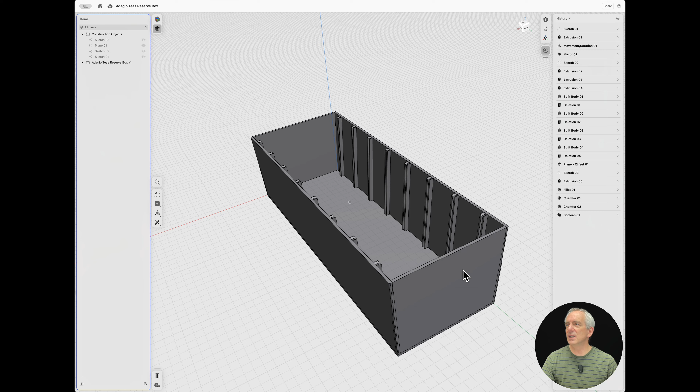I'm going to make a purpose-built box that's going to fit them better. That will be today's daily print. So there's nothing particularly complicated about this design. Here it is finished. I'm going to go ahead and put a breakpoint in up top. And let's bring this first sketch and make it visible again. So it's just a rectangle, 356 millimeters long by 126 wide. 356 is just under the 360 that fits on my printer.

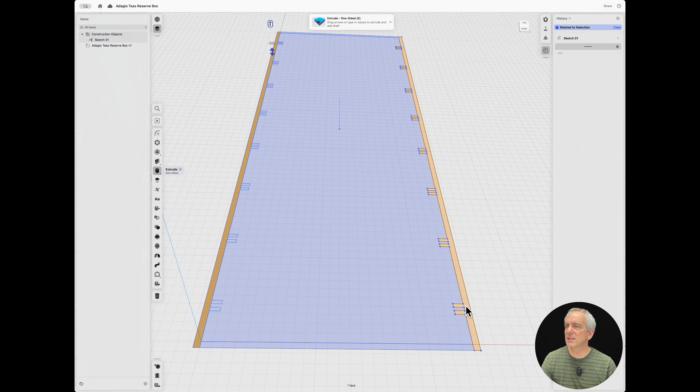And then I would extrude these sides up, the two sides, not the ends. And I began going in and trimming these endpoints on these rectangles. So these little flanges, almost like brackets, I drew this first one here, just drew two rectangles, and then selected them as objects, and then used the linear pattern to bring them down all the way to here. About 36 millimeters between them, 8 of them stretched over the distance that's centered.

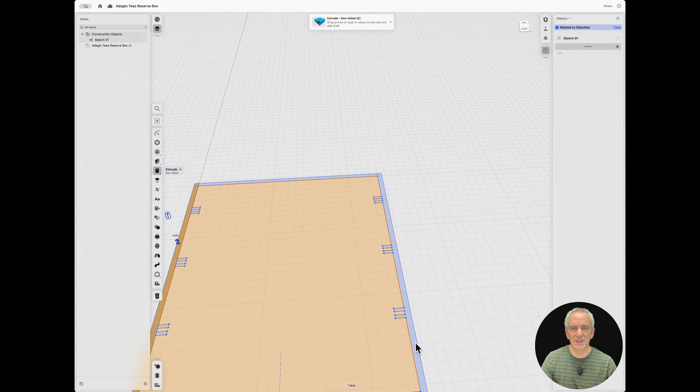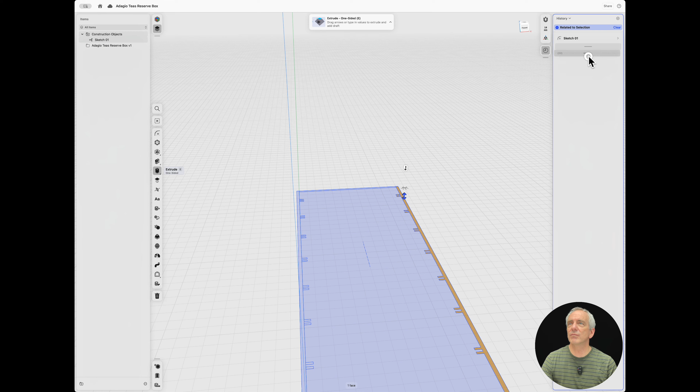Anyway, I need to extrude this up, and on this side I needed to also take away these ends to extrude it, and I had used the center line to mirror these small bracket pieces over to the other side. I wasn't thinking straight. I didn't need to do any of that. All I need to do is make this one side and mirror the whole thing. Anyway, so moving on, insert the breakpoint.

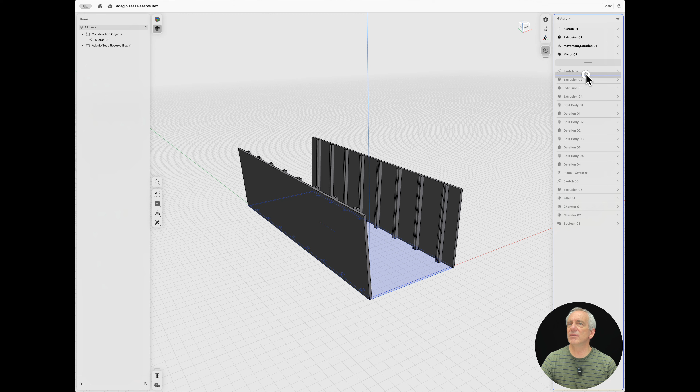So I went ahead and extruded this one side and then took its top and moved it out 6 millimeters so that this ends up having a bit of an angle out, which is what I wanted. And then that could just get mirrored over to the other side. So there are my two sides. The ends I didn't want to have tipping out. So I then sketched above, and that sketch is not visible. I sketched above it, and these rectangles then at the ends I could extrude down. And so those got extruded down on each end.

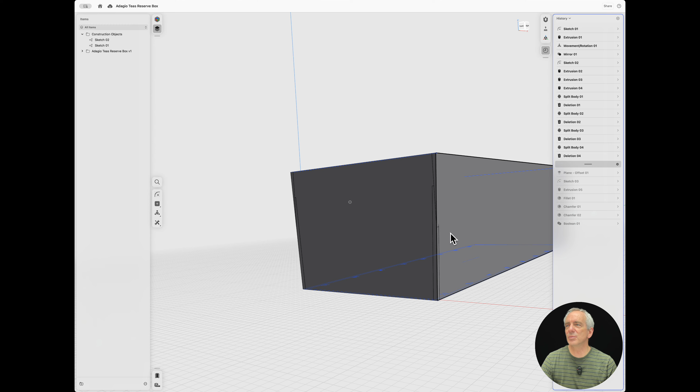And of course they came down straight, so they're a rectangle, but these pieces they're forming the ends for have a bevel, have an angle. So then, and I was not on the top of my game today, I messed around here a bit and kind of screwed it up, but what it amounts to is I deleted those extra bits by using these outer surfaces as the cutting plane, selected the ends, said split this on that plane, and then cut them off each corner. Pretty quick. And with the chamfer too, that was it. That's the whole design. Okay, next up, slicing.

I'm going to take the design and drop it into PrusaSlicer. And I sized it so it just barely fits on the flex plate on the print bed. That's fine. I don't seem to have turned this all into one unified object the way I intended, but I just went ahead and told Prusa to treat it as one object. It's already sitting flat on the bed. There's really nothing I need to do to this.

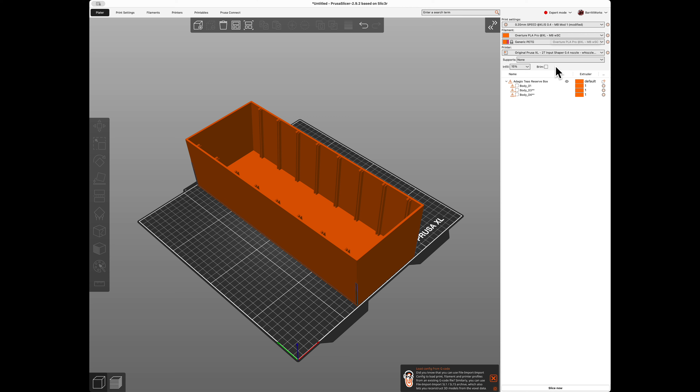So I'm going to use a 0.4 nozzle because that's what is installed, and Overture PLA Pro, which is the PLA I use most often. And I've got a profile for it, which has got a shrink compensation factor in it. So my prints come out actually very, very close to the actual sizes. 12 hours and 50 minutes.

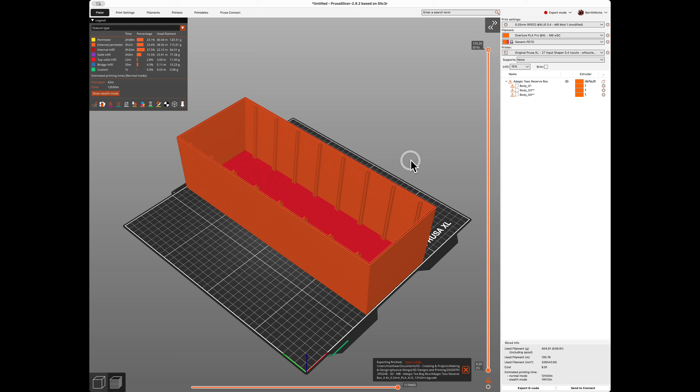And because of an outage at the moment with the network, I'm going to export the code and get it onto the printer a bit more manually than normal. So I'm going to export the G-code and save. And that's really it. Okay, I'm going to quit Prusa Slicer completely. I'm not going to use the connect portion of it because, as I said, there's a network issue. I will load this up to the printer and get it started. And then be patient. That's it for now.

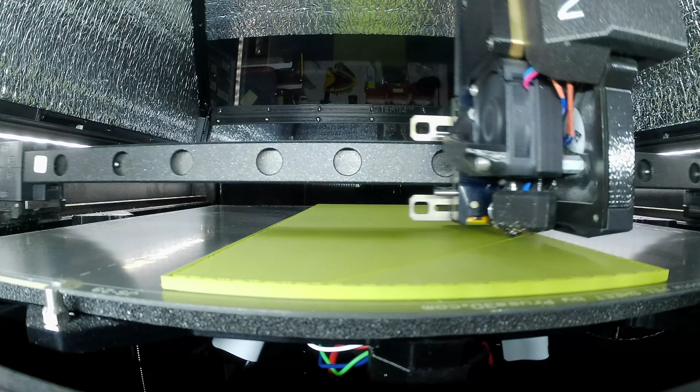I woke up to the print being finished. Perfect print, no problems at all. So let's see how well it fits with a tea bag. Okay, I'm not surprised to find that the side structures that were potentially going to be rails that individual tea bags slid into, and then this would hold 8 tea bags in a very orderly fashion. That was kind of a silly idea, and as it turns out, the box is a touch too wide for that even to have a chance of working.

So it will give a little bit of resistance for bags falling over when the box isn't full, and I'm going to take that as an accidental win and say this is done. And the hope is that every bag of tea that we have at the moment, loading it while holding it up to the camera is not perhaps the easiest way to load it. Anyway, hopefully this will hold all our bags of tea. Yep, just about. 2 that went on the floor I'll add to it. And there we go. Tea box for the cabinet.